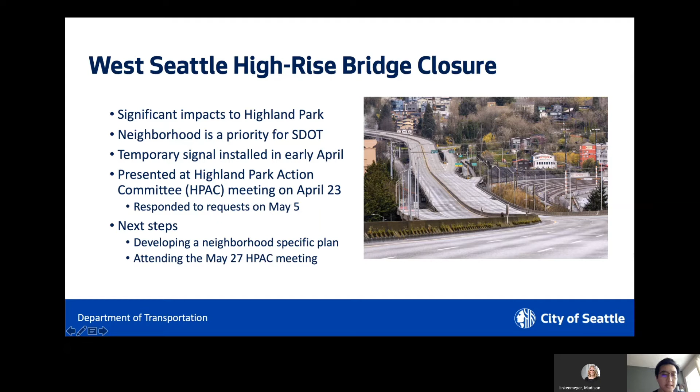We presented to the Highland Park Action Committee on April 23rd, and provided a detailed response to the community on May 5th. Our next steps for West Seattle as a whole are to develop a neighborhood-specific plan and to attend the May 27th Highland Park Action Committee meeting.

Our goals around this project are focused at the intersection of Highland Park Way Southwest and Southwest Holden Street. We want to improve safety for everyone, identify the neighborhood traffic issues in this area, and take that temporary signal we installed and make it permanent with concrete curb bulbs, sidewalks, and metal poles. We want to provide some bike facility between Duwamish Trail and Highland Park area, which I'll go over a little bit later, and we want to provide plenty of opportunities for public input.

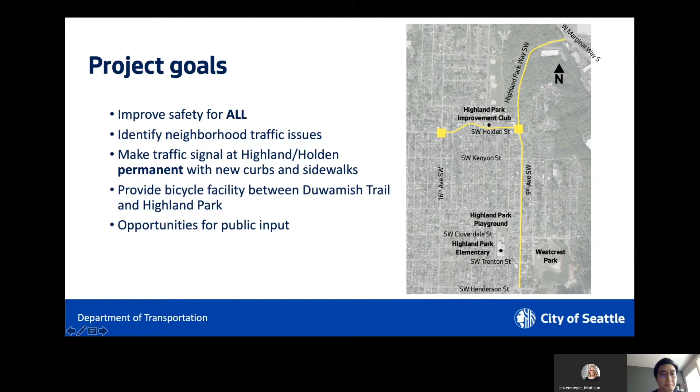Way before the West Seattle Bridge closure and COVID, we knew that the intersection of Highland and Holden was a major ingress and egress point out of West Seattle. More than 20,000 people walk, roll, bike, and drive through this intersection every day. Sightlines are constrained at this intersection, mostly due to the 11% grade on Highland Park Way Southwest. Metro Route 131 serves this area. There's an existing multi-use path on the east side of Highland Park Way Southwest, and this project is primarily funded by the Mercer Megablock proceeds and the Move Seattle levy.

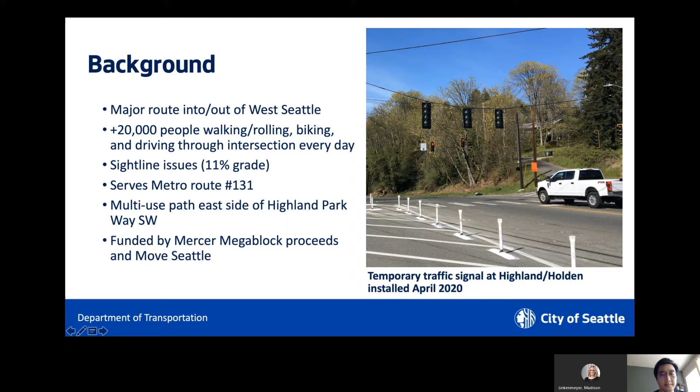There have been crashes around this area, primarily at the Highland and Holden intersection—195 total crashes throughout the whole project area, and as you can see on the graphic on the right, there have been fatal and serious bike and pedestrian crashes throughout the neighborhood area. These crashes happened before the West Seattle Bridge closure and before the temporary traffic signal was installed, but we want to move forward keeping our decisions and design data-driven.

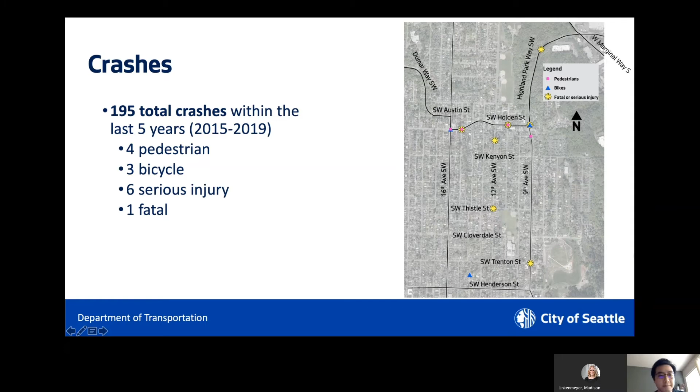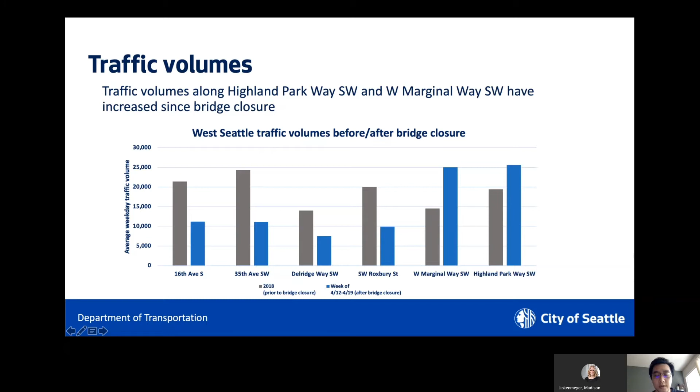As you may have seen throughout the West Seattle area, we have placed tubes for counting the traffic coming in and out of West Seattle. We know that traffic volumes have decreased on a majority of arterial streets, with the exception of West Marginal Way and Highland Park Way Southwest—those volumes have gone up, especially when the stay-home order is in place. So Highland Park Way Southwest is a particularly important corridor that we want to take a look at with this project. The data we collected late last year informs us of the traffic calming strategies we should use to reduce vehicular speeds throughout the neighborhood.

Traffic speed cushions and humps are one of the primary strategies we look at when trying to reduce vehicular speeds, and this is typically done through vertical deflection. We know that installing these may impact emergency response times, and because vehicles have to stop and go, it may increase some noise levels when cars are going through the neighborhood.

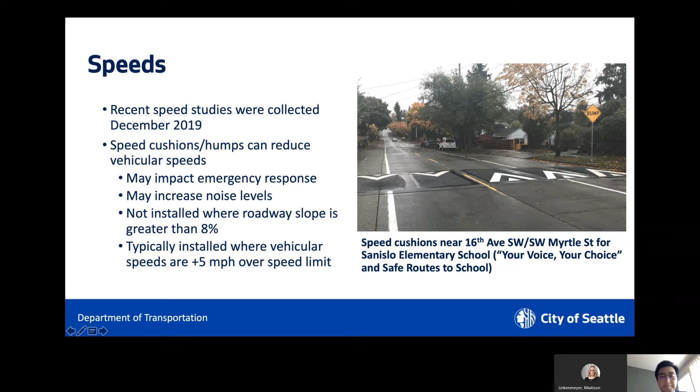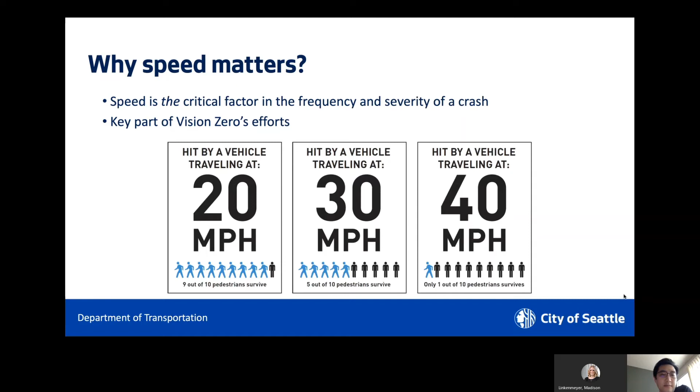Speed is the critical factor in the frequency and severity of a crash. A person struck at 20 miles per hour has a 90% chance of survival, whereas someone struck at 40 miles per hour has a far less chance of survival. It's a key part of Vision Zero, and it's also a key part of this project. Based on the speeds we collected late last year, we know where to install these traffic calming devices throughout the Highland Park neighborhood area, placing these devices and strategies where vehicular speeds are traveling greater than [the posted limit].

So some of these areas, we're looking at speed humps or cushions. Along 9th Avenue Southwest, we're looking at speed humps or cushions, parking edge lines to narrow up the travel lanes, and some painted curb bulbs around where there are some existing bus stop areas.

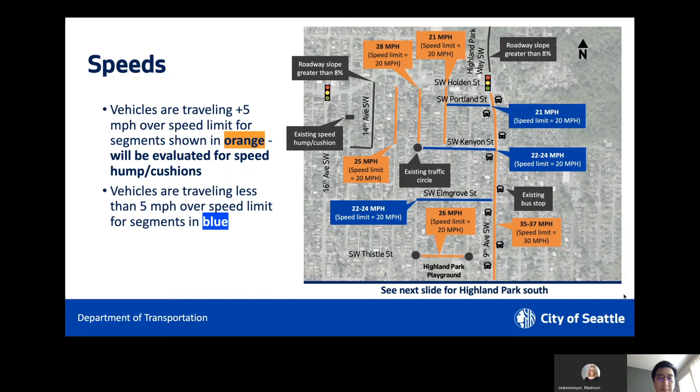Looking south of this area, because it's around an elementary school and a playground, a lot of traffic calming devices have already been installed and are going through further evaluation for additional devices. These have already been installed by Safe Routes to School and the neighborhood greenways. Through this area, we're also looking at doing more speed humps and cushions on 9th Avenue Southwest.

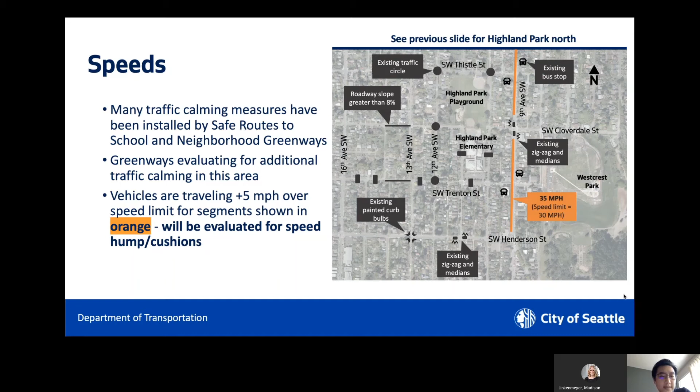So we've heard a lot of things from you guys about this project area. We heard to install a traffic signal or roundabout at the intersection of Highland and Holden. We studied the roundabout late last year, and because of the significant grades on Highland Park Way Southwest, it would have contributed to a significant cost to the installation of a traffic control at the Highland-Holden intersection.

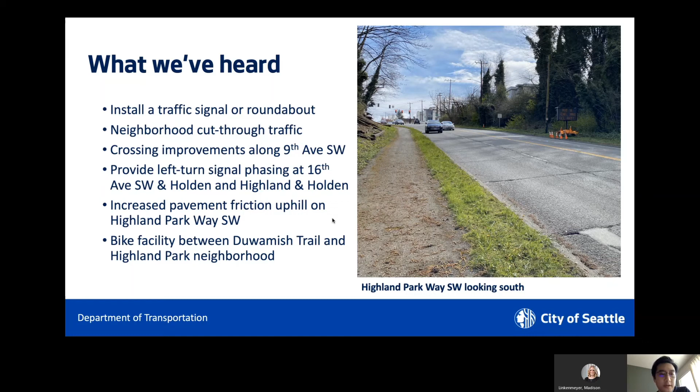We heard that there are a lot of neighborhood cut-through traffic, particularly when Southwest Holden Street is backed up. We heard that there should be more crossing improvements along 9th Avenue Southwest. At both 16th and Holden and Highland and Holden, there should be a left turn signal phasing. We heard that there should be increased pavement friction going uphill on Highland Park Way Southwest. And between the Duwamish Trail and the Highland Park neighborhood area, there should be some kind of bike facility.

So we went ahead and implemented some improvements short term. I mentioned before that with the increased volumes going through this area, we definitely want to get more of these improvements out quickly. So we installed the temporary traffic signal last month.

We are going to install left turn lanes at 16th and Holden, funded through the Your Voice, Your Choice program, as phase one of our traffic calming approach. We are going to reduce the speed limits throughout the arterial streets through the Highland Park area to 25 miles per hour. We are installing parking lane lines and painted curb bulbs all along 9th Avenue Southwest.

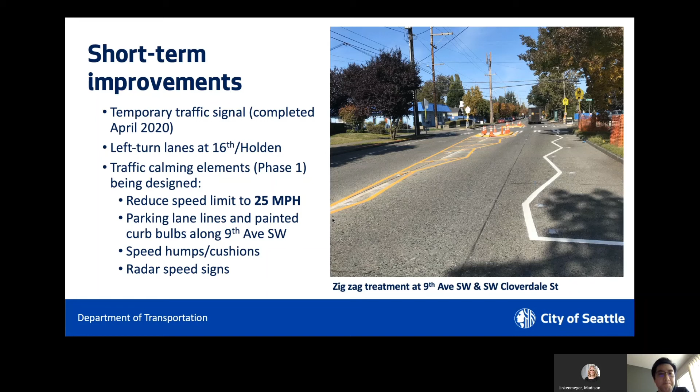We're evaluating for speed humps and cushions throughout the whole entire area, and we are looking at locations for radar speed signs. The graphic on the right illustrates some of the improvements and where we're planning to install them.

We're looking to make the temporary traffic signal at Highland and Holden permanent, with concrete curb bulbs and sidewalks. At this time, because Highland Park Way Southwest is being used as a detour route and traffic volumes are higher than before the West Seattle Bridge closed and before COVID, we are looking at widening the existing path. We are going to evaluate for a protected bike lane along Highland Park Way Southwest in the future when traffic volumes return back to normal.

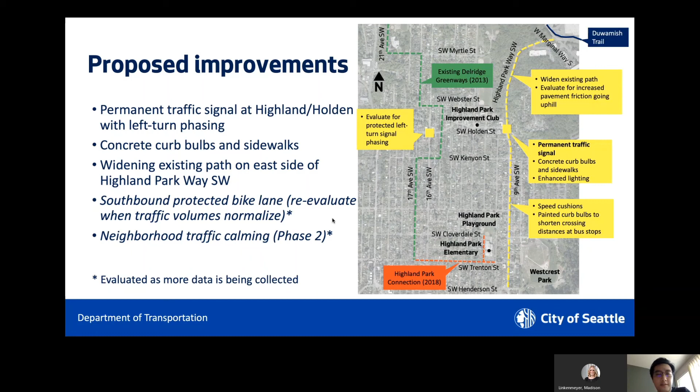We are going to look for your input and feedback if you think some of this data doesn't match your experience, or if there's something else we should look into. We ask you to participate in the survey and provide us with feedback about what you've heard today. We have translation services available, and we're going to provide this feedback and input period throughout the whole month of May, seeking your input and feedback.

A little bit later this month, we will be presenting to the Highland Park Action Committee, so look out for that. Later this year, we're going to give you an update on our design and present on that. Later this year, we're planning to implement the neighborhood traffic calming mentioned during this presentation, and we're going to look to go to construction later next year in 2021.

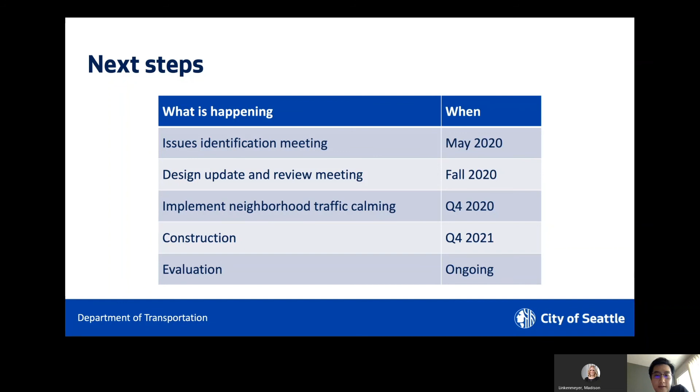We're going to continue evaluating this project right now and after it's implemented. If you have any questions, you can contact us either by email or by phone, or visit us on our project website. Thank you.